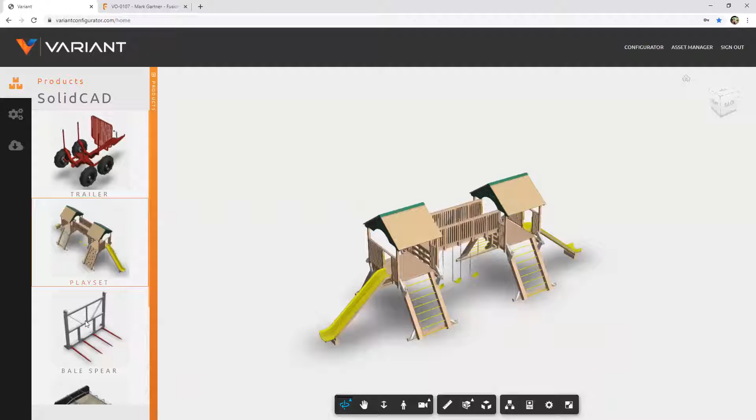Okay, so now that we're logged into Variant, you can see that it comes up very quickly. It is a web interface, gives you access to interrogate the models. We have a number of products listed here on the side. As I select those products, they become viewables in the window that I can now interrogate and work with those models.

So being a web interface, I actually loaded it up on my iPad the other day and my phone, and ran through a configuration as well. So access anywhere at any time.

I can go full screen. I can look at my options. So just moving down, let's take a look at a couple of configuration options that we have here.

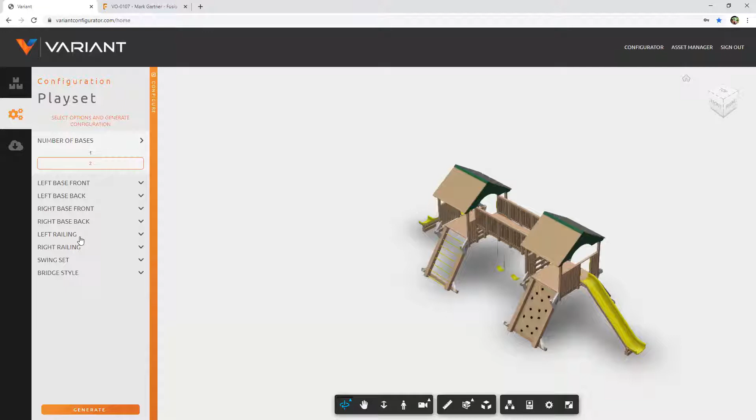So when I go through and select the number of bases on this playset, if I say one base, you can see a number of the options disappear down here. When I say two bases, it comes up and says, oh, by the way, now that you say two bases, you have a lot more options available to you. So we've added in a lot of logic inside here.

Today we're actually going to work with the bale spear, and this is from our customer Horst Welding. They allowed us to use this product inside the Variant product, so we're very happy to be using this bale spear from Horst.

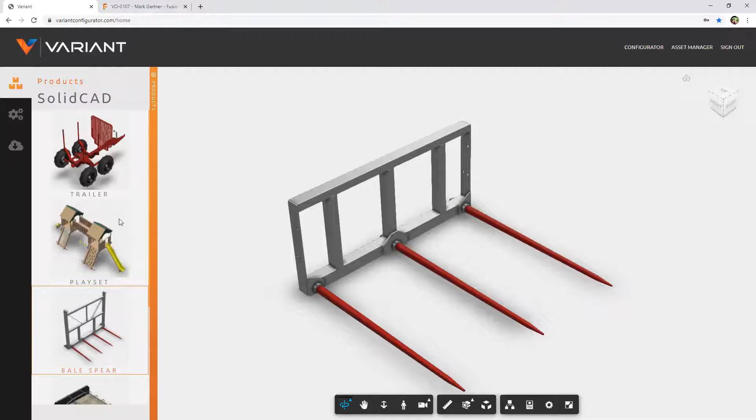So let's go through and actually build a configuration. I'm going to select just a model that I can use. As you can see, the updates for the model come very quickly. I generally don't have to wait for anything to be selected. So let's just go through and create ourselves a quick configuration.

All right, so now that I have this configuration, I'm going to go through and generate this. What it's going to do is send this up to the cloud to go through and calculate and give me all my drawings and quotes and everything that I've required. It's going to bring that all down for me.

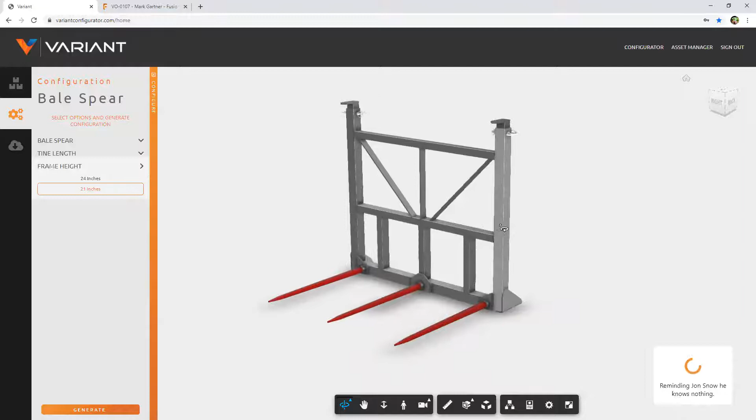So with the Forge interface, I have the ability to orbit, zoom, or pan, very easily just by using my mouse. I do have a cube up here that I can use as well, just to zoom around and move my objects around.

Some of the other options that we have, some measure options down here. So if I wanted to see how far apart these tines were, I could see that they're 22.8 inches apart.

I could go through and explode this model if I wanted to, just to see how it was actually put together. So it might allow me just to see some internal components possibly.

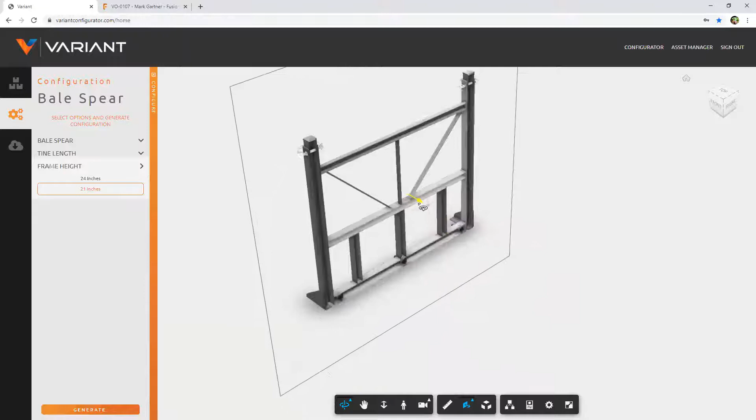Okay, we can also go through and section our model. So maybe I would like to just go through and see, hey, what do those internals look like? We can easily go through and see what that might look like internalized.

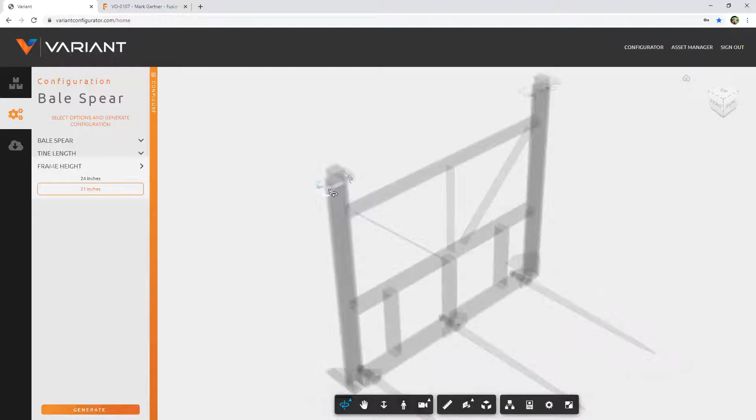Some of the other options, maybe we want to single out this component up here. Maybe we want to isolate this component so we can actually take a look at that. And I can see in the bill of materials, what is this component? Well, I can see that that's the draw pin. So it gives me a little bit more information than just a model that it's created.

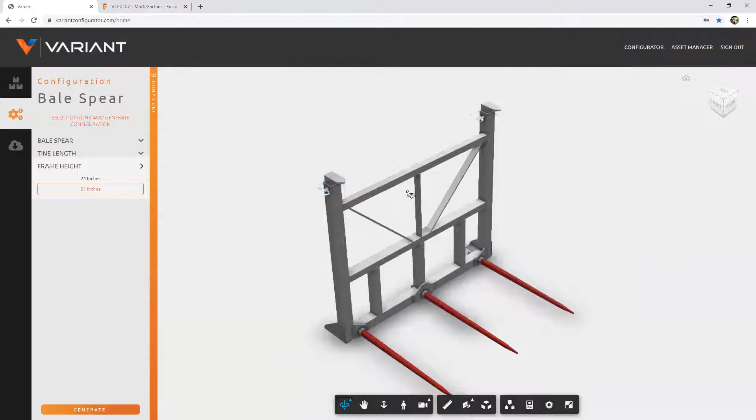Okay, now that we've got the model created and we've sent that up and everything is created for us, let's go through and see what we can actually do here now. So we actually have a quote that is created for us. I can go through and say, I'd like to download this quote.

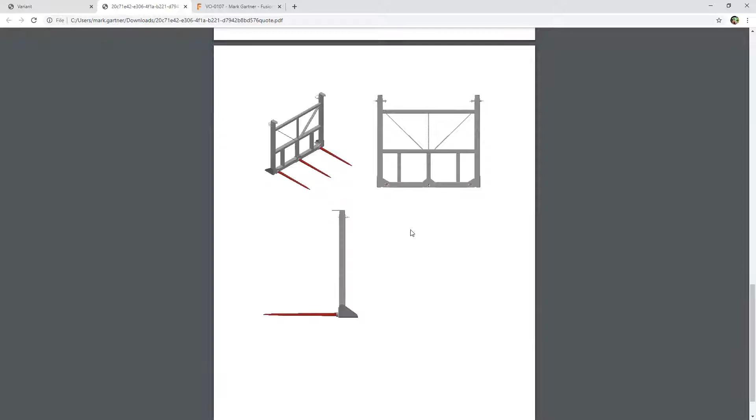So these quotes are customizable by you, the customer. Put your logo up here. It is dynamic, so I am logged in, so it's got my name here. It puts the date and so on. We've got a little pricing put in here. We've gone through and created a number of views that we've attached to this quote. So if these are things you'd like to put in your customer-facing quote to make that customer experience a little better, you're able to go through and customize this any way you'd like.

I can also download a drawing. It's gone through and created a drawing for me. In this drawing, we just have an isometric view along with a bill of materials. If you wanted balloons added here or any dimensions, these are just drawings that you could create on your own that would be able to be downloaded.

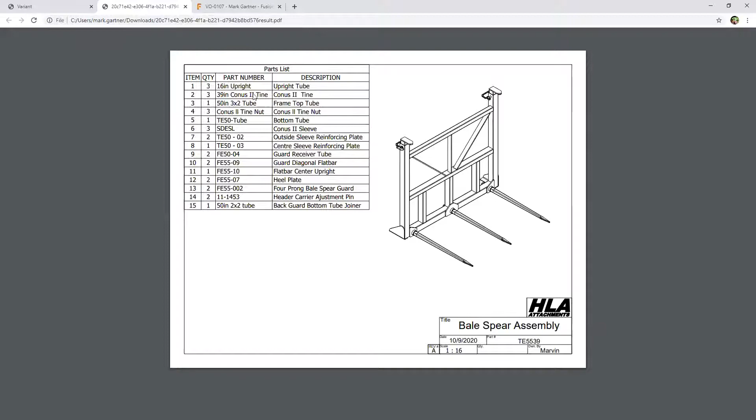I also have a bill of materials that's created along with this, and I can download this bill of materials to a CSV file. So we can see here that it has downloaded the information. It's given me what part number it is, how many there are, and what it's made of.

I can also send this directly to an ERP. Right now I am not connected to an ERP, so this button wouldn't really do anything for me right now.

I can also download the configuration. By downloading the configuration, what it's going to give me is all the parts and assemblies, everything I need in order to create this model. So maybe I wanted to do a little bit more engineering on it.

And the last button we have is order configuration. I'm going to go through and actually submit this as an order. Customer name, I'm going to put my name in here, my email, and my phone number, and my company name is my farm. If I had any special requests in here, like I wanted to maybe make the tines yellow instead of red, I could enter that information here.

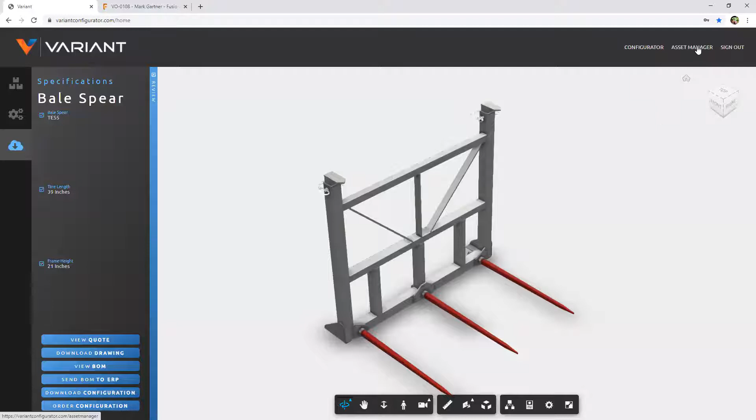So while it's doing that, let's go through and actually take a look at some of the other functionality we have here. Within Variant, I have an asset manager for saved configurations and products.

So I can go in and add my own products in here. So we're going to do that. Let's go add a product right now. So the product that we're going to add is a railing. So let's go through and get this added. Let me go through and select a bucket.

The bucket is just a place in Forge for me to put all of the information. I'm going to go and find that file to upload. So there's my railing. Now I need a project file and a drawing file and a root file. I've got that information just kind of set off to the side here, so to make things easy, I'm just going to copy and paste that information in.

So there's my project file from within Inventor. Here is my drawing file that I'm going to use. And then I need to bring in my assembly file. So now I've put in all of that information.

I'm going to go through and just select just a couple more buckets here to put in some basic information, or some information that we don't want to keep. Where's my quote going to end up? I'm also going to go out and I've created myself a Word document for this quote. I'm just going to load that up, and we're going to upload this.

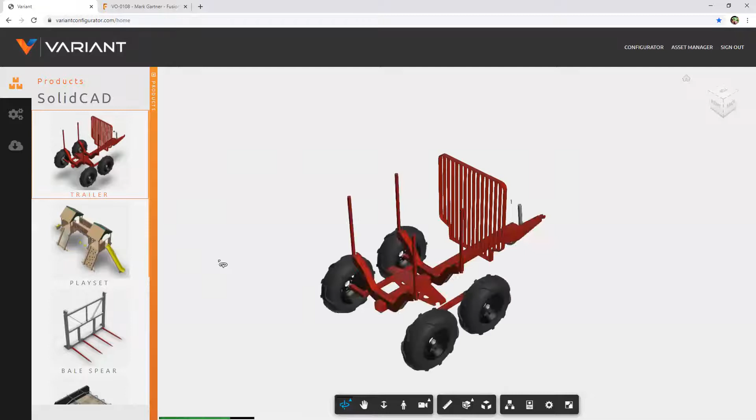Yeah, so Variant was developed to either be for your sales department or to be actually customer facing. We're going to go through and talk about the different user licenses that are available. But yes, the functionality for the users, if you had it customer facing or sales facing, a lot of the technology for adding different components or changing the names of them or those types of things is not available in the user license that we have available. You would need to have that administration purpose.

So did that answer the question, Ryan? I think it does, thanks Mark. Perfect.

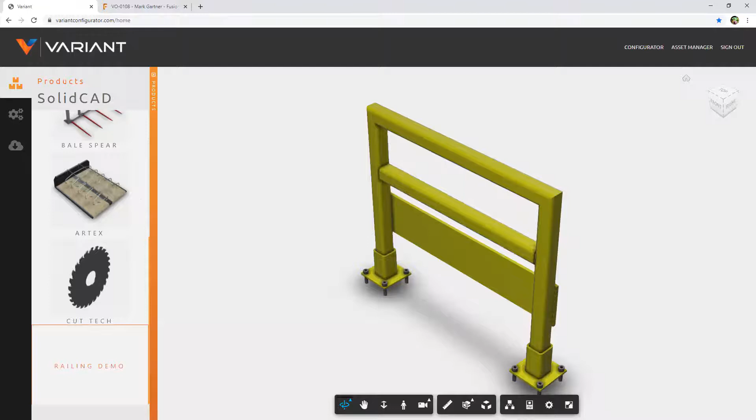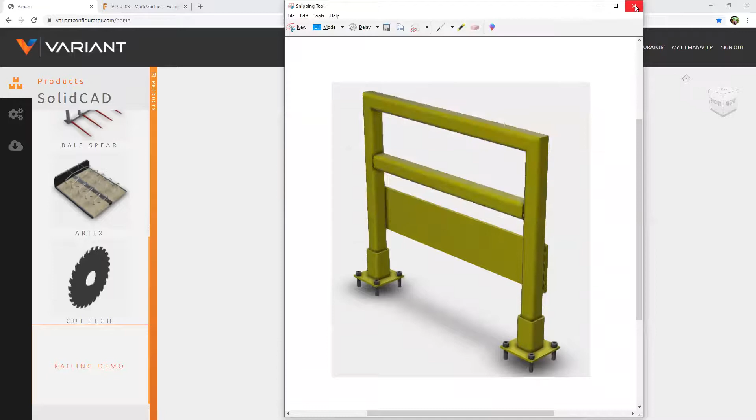Okay, so here we can see we've got our railing in here. Now I know I needed a thumbnail, so what I'm going to do is quickly go through and take a screenshot of this, because I need to add this just like the other ones with my thumbnail. So I'm just going to save this. I know I've already got one, I'm just going to overwrite it. Perfect, all right, so let's just take a quick look at what we've got here.

So I can go through and select the different materials. Maybe it's aluminum, maybe the bottom rail is a rail, it's not a plate, okay. And go through and select my rail height. So I can see here that I may have a little problem.

Now what do I mean by that? I can go in here now and say, you know what, this is 10,000 inches high. Well, that might be quite an impossibility to build. So maybe what I should have the ability to do is go in and limit what my entries are. Well, we have the ability to do that.

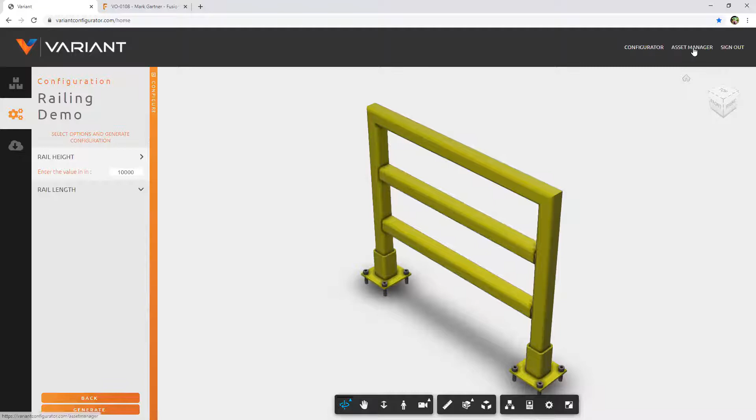So let's actually just go back into our products here and edit that. So here's my railing. First of all, I'm going to update the thumbnail. Okay, so we have the railing that's going to show up there. Let's upload that.

I'm going to edit the parameters. Okay, so the rail height - what I need to do is add in a value condition. So what I'm going to say here is I'm going to put an if statement in, and that if statement I'm going to add is this one here. And I'm not going to type it again, but basically what it's telling me here is the rail height variable can't be smaller than 24, but it can be equal to 24, and it can't be greater than 48, but it can be equal to 48.

So I'm going to add that as a note here: rail height must be between 24 and 48 inches. And I'm going to save that.

Okay, so now when we're done with that, let's go back out. We can see our thumbnail is nicely uploaded here. Let's click on the railing.

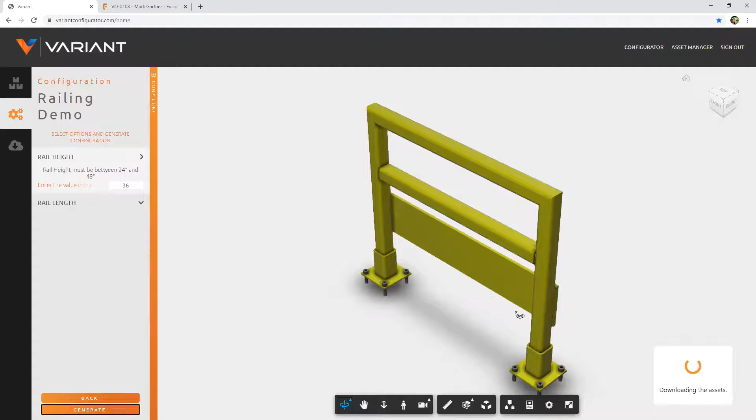Okay, now when I go through, I can see that it says rail height must be between 24 and 48. So if I say it's 50, it's going to say enter a value. Well, I'm going to say 36. Okay, and then I'm just going to go through and generate that. It's going to go through and put that once again up to the cloud, get everything developed that we need with the drawing and the quote, and bring up all of that information.

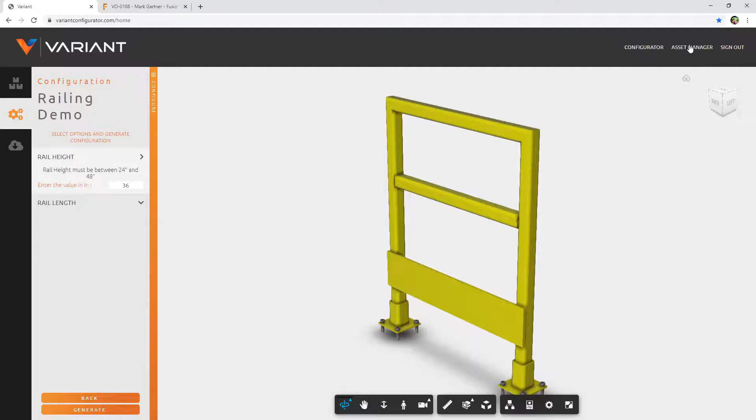Okay, perfect. So we've gone through, we've uploaded that, we've entered a condition, and so on. So what I'd like to do now is go through and, let's see here, Asset Manager. Let's go and load that saved configuration that we had earlier.

Okay, so this is going to be the last one that we did. I'm just going to load that back up into the system. So if you are working with a customer and you haven't gone through the order yet and your salesperson wants to save that configuration, they can go through and just save that configuration.

So what I'd like to do now is let's go back to Fusion Lifecycle, and I'm just going to refresh Fusion Lifecycle because it is a cloud app. We can see now that this order has been moved to an approved order. So in the background, while we were working, there were a bunch of connections being built in with Vault and Fusion Lifecycle and so on, and this order has come through as an approved order. If we would have asked for additional changes, it would have taken a different route, but we can see this is the route that it took.

So what else can I do here? Okay, so I can take a look at the bill of materials information. Right now this information has been loaded in here, and I can see that I now have an uploaded bill of materials. So from my engineering bill of materials, it comes into Fusion Lifecycle where now I have a manufacturing bill of materials. So I can add items here.

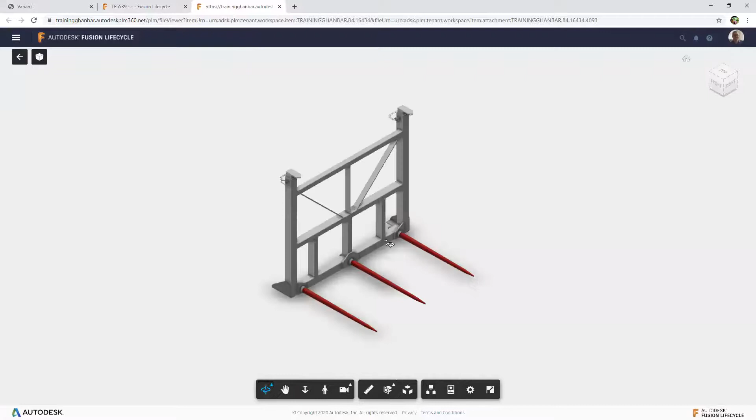So just to finish off here with Fusion Lifecycle, we do also have viewables built in. I can take a look at that assembly that was just created inside Fusion Lifecycle. So if somebody doesn't have access to Variant or your information, let's say it's a production manager, he has the same information flowing through the system as everybody else does.

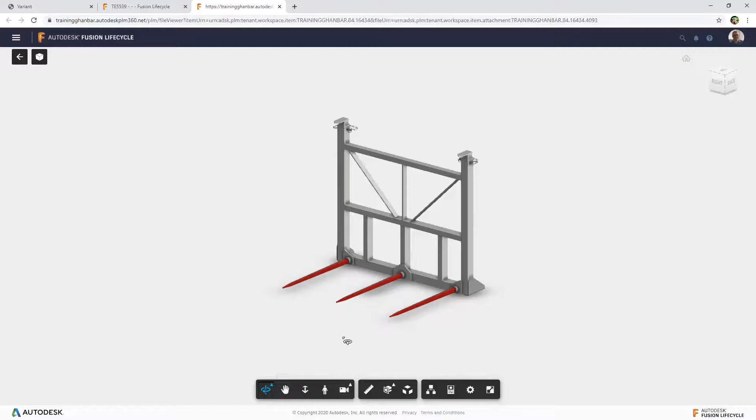And once again, the system is very similar to Variant because it's using the Forge interface with inside Fusion Lifecycle as well to do all of that information. So at this point, that kind of wraps up the live demonstration of Variant and Fusion Lifecycle. Let's just take a quick look here.

Just to bring up some key features from within Variant: it is web-based, so nothing to install. It's accessible anytime, anywhere. As we talked about, if you want your salespeople to access it, that's great. If you want to open it up to a customer-facing website, you have the ability to do that as well, where they won't have all that functionality to upload models, change the variables, and so on. So allowing you to increase your sales by reducing your engineering cycle times.

I know a lot of customers I talk to, that interaction between sales and engineering can go on for a long time and then back to the customer and so on. So it's just reducing that time and that information. If you could be standing in front of your customer with Variant open and picking those options and have that customer see exactly what they're going to get and understand how much that's going to cost, you've just saved yourself a lot of time.

Building those professional quotes as well, those are customizable by yourself, however you want that to look for customer facing. And once again, we do have it integrated within Fusion Lifecycle and ERP for that workflow process of order processing. If that's something that's really interesting to you and you want to simplify that process, we have that built in.